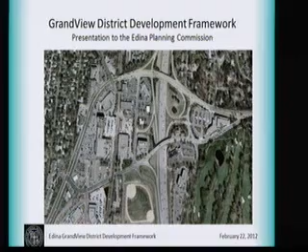So it's a good way, I think, for people to orient themselves as to the area that we're talking about.

So let me start with an overview of what we're going to be talking about. There are 4 things I really want to go through in the presentation. First is about the Grandview District. There are some characteristics about it that are really important to understand before you can think about what the future of that district ought to look like.

Second is describing really the process, and this has been what we think is a really new way of thinking about community engagement and community leadership in a redevelopment process. I'm then going to ask Mike Fisher to go through a description of what we envision, and then return to talk a little bit about what happens next.

So when we talk about the district, it is approximately 37 acres and 18 parcels within those boundaries. Over a third of the property in the district is publicly owned, and this is one of the things that distinguishes it from many other things we on the Planning Commission deal with, where we influence change entirely through regulation. Here we have some direct control through public ownership of a lot of the land in the area. It's home to City Hall, as I mentioned, and the police station on one end, and the library and senior center on the other end.

The Edina Public Schools bus garage is located within the district, and the public works site that is now vacated is also within the district.

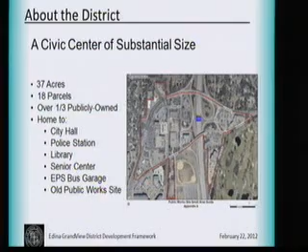As those who live in the area know, this is a true neighborhood commercial center. I live in the Highlands neighborhood, so I'm not far from here, but this is just a small list of the commercial services and goods that everyone who lives in the area uses on a regular basis. I know I'm up there every day patronizing at least one of these businesses.

The other characteristic about it is that it's really a kind of crossroads. It's a neighborhood center, but it has regional connections. So if you take a look at the map here...

You really have Vernon Avenue, which goes south. Once upon a time it was Highway 169, and it was the way you went from the Twin Cities down to Mankato. You've got Interlachen, which takes you up to St. Louis Park and Hopkins. Highway 100, obviously, north and south. And then there's the rail line.

If you take Vernon across 100, you get to 50th Street, and you're over to 50th and France. So it's a key place for regional connections.

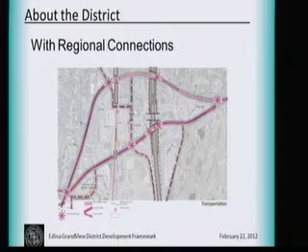The process we're engaged in right now was really triggered when the old Public Works building was vacated. It's about a 3.5-acre parcel, and for years the city was looking for a new home for the Public Works site, finally opening a new location on the south side of Edina in 2010, which left a vacant piece of property that triggered our work on this process.

In 2008, the comprehensive plan was amended by the City Council, identifying a number of areas around the city as potential areas of change. The Grandview District is one of those. The plan indicates that if there's going to be major redevelopment or rezoning in one of these areas, a small area planning process needs to happen first.

In December 2009, before the Public Works building was abandoned, some of us on the Planning Commission anticipated we'd need a planning process. We approached the City Council and requested permission to proceed with what we called a small area guide process. It was interesting for a variety of reasons.

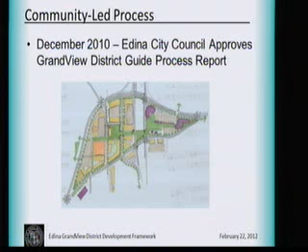In December 2010, we delivered a report to the City Council and asked for its adoption and approval, and the Council did adopt the Grandview District Guide Process report that came out of that compressed process. That report created 7 guiding principles, which I've listed here and will quickly sketch over.

First was to leverage publicly owned parcels and civic presence. Second was to enhance economic viability as a neighborhood center with regional connections. Third, we wanted to turn barriers like Highway 100, the railroad tracks, and the roads into opportunities rather than seeing them as barriers.

Fourth was to pursue logical increments of change. Gone are the days when you can just clear an entire area and rebuild it.

And we recognize that we have to do this parcel by parcel, which is a little more complex and takes a little more thought, but it's important for us to recognize. Fifth was to organize parking as an effective resource.

We had an interesting business member who came to us during the guide process. He has the UPS package store, and said it's really important for him to have parking right outside his window because sometimes customers come with a 40, 50-pound package, wrestling to get it out of their car, and he can run out and help them. If there's a central ramp that someone has to walk 100 yards to get to his business, it's not going to work for him.

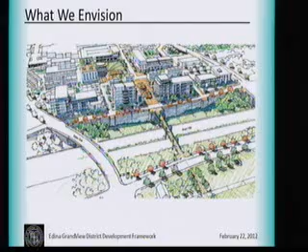So in summary, we want to create a place with a unique identity. We want to rethink and reorganize the transportation infrastructure. I'm going to talk about that a little bit. We're going to leverage these public resources to make incremental value-creating changes. And we're going to enhance that public realm to encourage the private development, as I just said.

So we want to create a place with unique identity. One of the key parts of this design is the Central Commons, which is located on the Public Works site - this entire block here. It's an idea of a community facility and community space, outdoor space, plaza-type space where people will gather.

Getting back to the plan, there's a go-to and a stay component. This area is designed for businesses along Vernon focused on drive-in, park, go in, do your business. But the other area of the development is more pedestrian-oriented - it's not that you can't drive there, but it's really about wanting to stay and spend more time.

So this is a concept of a community facility. We don't know everything that's going to be in this community facility - that's part of the next stage, where we as a community need to figure out what that means, what would be in that type of building, what would be programmed in the outdoor space, with a lot of mixed-use development around it.

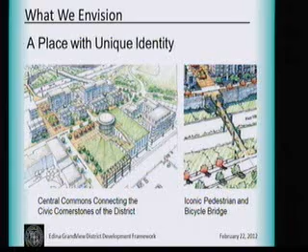Over here you can see a concept for a crossing of Highway 100. Let me go back just one slide. So again, the commons here, this pedestrian zone, and crossing 100.

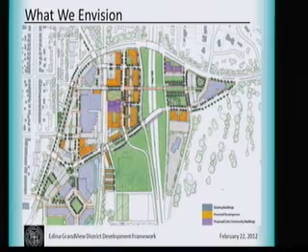One of the hallmarks of this plan is pedestrians and bicyclists being able to move through and around the area. Another very important element is connectivity - how do we bring people here, since this is a neighborhood center, yet it's almost impossible for neighbors to get here without getting in a car like the rest of the region would. So what we're trying to do is poke into the neighborhood on all sides so you can get here on foot and by bicycle.

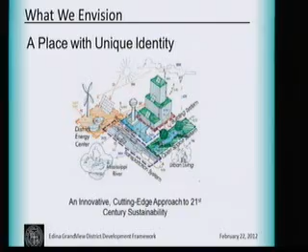Part of this unique identity is to be cutting edge and sustainable. I won't spend a lot of time on this, but overall we're thinking about the development, from the infrastructure to the buildings, being highly sustainable - rethinking and reorganizing the transportation infrastructure.

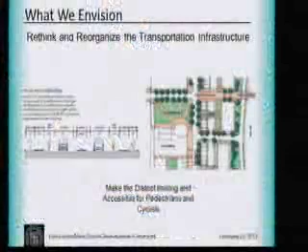When I showed you Vernon Avenue earlier - we just had a couple days of talking about living streets in our community - this is an ideal example of how we can rethink Vernon Avenue and transition it from a highway to a local city street again, by right-sizing it, having bike lanes, sidewalks, and safe ways to cross Vernon. It does not have to act like a highway as it comes through this area.

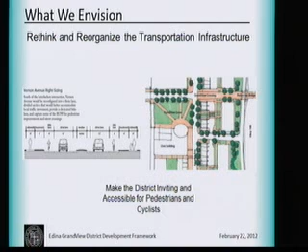And also the Grandview crossing, as I pointed out earlier, the bridge crossing over 100. We're actually, I'll show you in a second, creating a few new street connections.

Use this illustration - so the plan on the left, here's Vernon, where I talked about rethinking and redesigning it. There's also a connection - this is the library right here, and this is Jerry's up here. One of the ideas is that right now, from Grandview Square to get up to Jerry's is not a pleasant walk - I'm not sure you'd want to do that of your own free will. And where the bus garage is now, imagine these big yellow buses hanging out all over the place, over the edge of the property line.

One other thing I want to note: part of the original concept, with the library here, was this idea of creating a front lawn to the library - bringing the library out to Vernon, connecting the two. Right now the library is set back, so you can't really appreciate it as you're coming along Vernon. The concept was to close Sherwood up here, add parking in front of the library, and bring Sherwood out on 53rd.

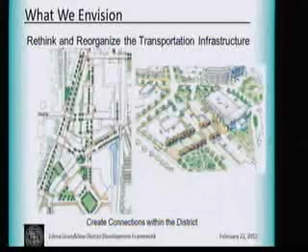I didn't point out, this was that concept we were talking about with the lawn in front of the library and that parking. So we think there's some other ways to accomplish this and not necessarily completely change Sherwood there in front of the library.

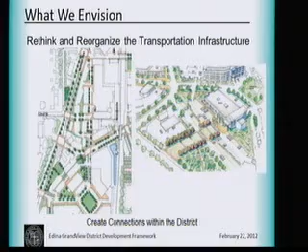So I'm going to roll a little faster here. Rethinking and reorganizing the transportation infrastructure. Now, as we look at the whole area, a couple key moves here. I talked about creating a new street, and it will be right through here.

So this is what we all think of as Jerry's Hardware, which is now soon to be Walgreens, and the new Walgreens drive-through here. This is the Jerry's, or City, it's actually the City parking ramp behind Jerry's. But to actually create a bridge across the tracks right here and have this street go all the way through, which would go just north of the commons I was just talking about, and then it turns into a pedestrian street right here as you cross the bridge over to the City Hall side of the highway.

Ultimately reorienting the development on the north side, so what we think of as the Starbucks building right now, actually reorienting itself to look south towards the commons, but also still having parking and opportunities for fronting on the other side as well. It's taking advantage of a reorientation and the idea of a street coming through here.

But then taking Gus Young Lane and having that as a one-way going out. So we can, by doing that, reassign turn lanes up on Vernon to Interlochen to make the traffic actually flow much better. I'm not going to get into all the details of the traffic engineering, but there are some ideas there that can help move traffic through.

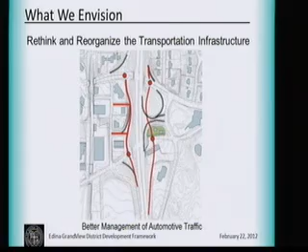I have a diagram here that shows, you can see in the gray, all of the highway infrastructure, these loops that were actually built when these were two highways intersecting. These aren't two highways anymore, it's a city street meeting a highway. So all this additional highway infrastructure could go away, creating other public amenities or development opportunities, or just green space for nothing else.

And this just gives you an idea of the richer street network that we will have 30 years from now, hopefully, than what we have today. The left is today, the right is in the future.

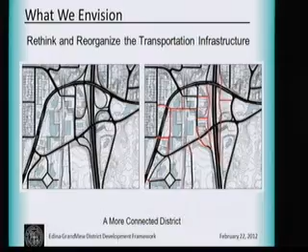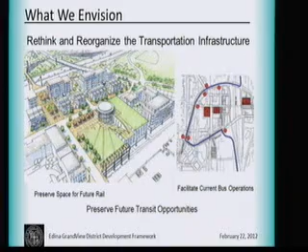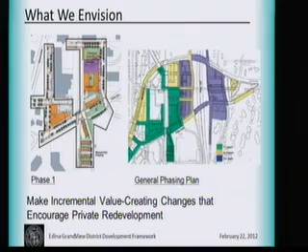We can make this change incrementally. I'm not going to get into great detail, but the idea is we're starting to think about what are the first pieces that can start all this happening. And it includes, obviously, the land we can control in turn - when I say we, the public. So we've got the bus garage and the public works facility as ultimately two easy places to start the process.

And again, that notion of enhancing the public realm to incentivize the private development to happen. Here you can see all of the substantial public realm that could ultimately be improved and developed in this plan.

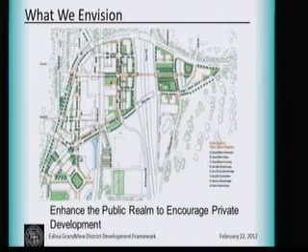And with that, I'll have Kevin kind of close it out.

Thanks, Mike. So a couple of slides on what happens next. Obviously, we're in a public comment period now. This is the public hearing we're holding, but we're also holding public comment open until March 9th. There's a variety of ways people can chime in. We've talked about the blog on the Edina Citizen Engagement site - encourage folks to get on there and share their thoughts about this. We really want to hear from people.

Tonight we had an open house out in the atrium here that included a number of poster boards, et cetera, that gave you an idea of what we're working on. We will have a portion of that continue to be set up here at City Hall as well as at the Hennepin County Library in the Grandview area, along with comment cards. So if folks at their leisure want to come through, take a look. We'll also have copies of the full plan or framework available at those places and comment cards so people can write down some thoughts.

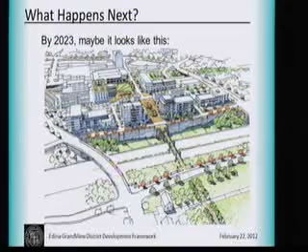So it looked like this in 1953. Maybe by 2023 it looks like this. So I want to thank you. I know this was a long presentation, but I appreciate your attention, and I look forward, as I know the steering committee members do, to hearing comments from the public.

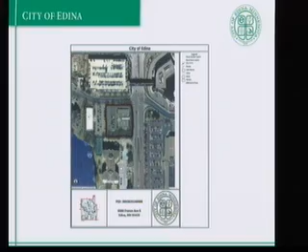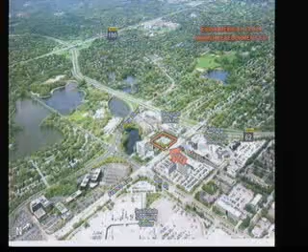The property is located at 6500 France Avenue. It's kitty corner from the hospital. This is a bird's eye view. This is the Point of France here. It's the site just to the north. It's the existing Milovitz building. This is a look at what that building looks like today.

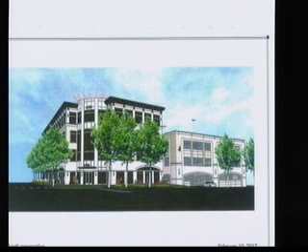The applicant is proposing to tear this structure down and build a new 60,000 square foot medical office building with an attached parking ramp. They're considering retail on the first level that would include potentially a coffee shop and medical supply type retail uses. The property currently is zoned POD, planned office district, and the applicant would be contemplating a rezoning of the site to planned unit development.

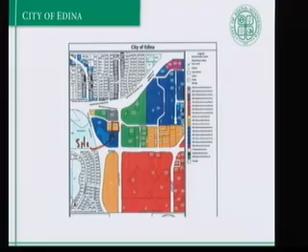This site is located, as we've looked at this map earlier this evening, in a potential area of change. Any time a rezoning is proposed in those areas, the decision to do a small area plan rests essentially with the City Council. So we would be looking for the Planning Commission's recommendation on whether a small area plan would be necessary before we consider any rezoning, similar to what we did with the proposals up at 44th and France and 70th and France as well.

When looking at the current zoning in the POD district, there would be a number of variances required under that existing zoning, 10 of them to be exact. The building setback requirement is based on the height of the building, which would be 55 feet. The applicant is proposing a 15-foot setback from 65th, a 15-foot setback on France, and a 20-foot setback on the south lot line that abuts the Point of France. The parking structure would be 46 feet tall, and they're proposing a 15-foot setback, 10-foot setback, and 10-foot setback. So variances would be needed under the existing zoning today.

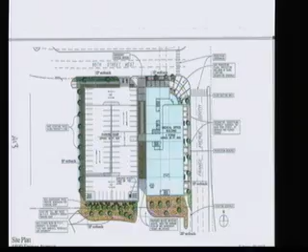Also, the height of the building would be 55 feet, as I mentioned, and the district requirement is 48 feet. The building coverage requirement in the POD district is 30%. The building coverage proposed here is 63%, another variance there. The maximum floor area ratio is 50% in this district, and the proposal is for 106%. And for parking stalls, they would be providing parking based on the need of the building itself, but it would be short parked based on code, so a variance would be needed there.

Now, again, as we've talked about with the PUD process, there wouldn't be variances—it would be rolled into the PUD zoning. And if approved, or if this is a project that we want to pursue, those existing or proposed setbacks become the requirement for that district.

This is somewhat similar to the Twin Cities Orthopedics Building. You may recall that was approved back in 2008. There were 9 variances associated with that project, similar, maybe not quite as large as we're seeing here, but there were 9 variances. The PUD process was not available to us at that time. So with that, the proposal would be an improvement over the existing uses that are out there. The proposed uses certainly would fit into this district, kind of that medical campus setting.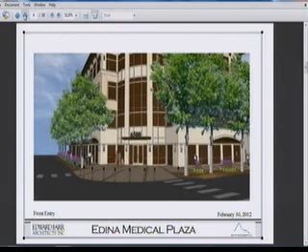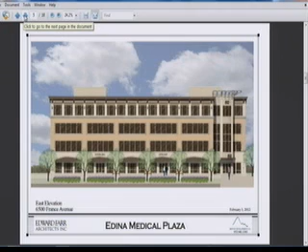Here's the main facade, the France Avenue facade. Again, traditional building. Our mission here is to be a healing center, so warm materials, very inviting. People are coming here in pain, and we want to make them as comfortable as possible. The use of face brick, a very warm, common, understandable material. The base, with the arches and rusticated limestone look, gives strength to the building. Up at the top, a very distinctive cornice line with interesting shadow lines and articulation to make it an interesting building on the skyline, punctuated at the corner at 65th and France with that scalloped crown element that will look good day and night.

Just a couple of images I'll fly around real quick here for you. You can start to see a parking deck along 65th Street, which we're going to build using the same compatible building materials as the building itself—a lot of the arching, the rusticated base, and the tonality of the structure. I'm showing it to you here with the trees that are existing, but actually the trees are much bigger—I had to scale them down for my rendering, because you couldn't see anything. So I decided to peel them off in the next slide. It's the same image without the trees, so you can see the architecture, but of course the trees would be there.

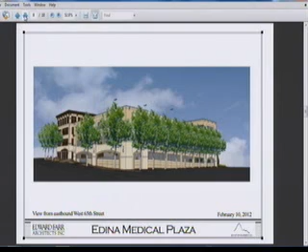Similar on the eastbound approach on 65th as you pass by the apartments on your right and the Twin City Orthopedics building, this would be the view as you approach the stoplight. Here's that row of trees on our western property line that would screen the parking structure. Please note I'm showing all these renderings with the full build parking structure up for the entire height. We're not proposing to build at these heights—it would be one story less. We're proposing 275 cars with proof of parking to add this final level deck. We wanted to show the ultimate visual impact, but we're proposing one level shorter. This same view without trees looks like this—again the same building material themes in the parking structure, variety of material, texture, and shadow lines, but with the trees there it'll be mostly hidden, especially at one story less.

Mr. Farr, just so I'm clear and everybody's clear, the last drawing you showed—that's the full height of what could be with the proof of parking, but what you'd originally start with would be one story less than that on the parking garage. Is that what you're saying? Yes. Okay, thank you for that clarification.

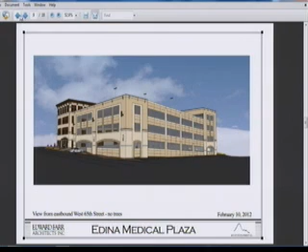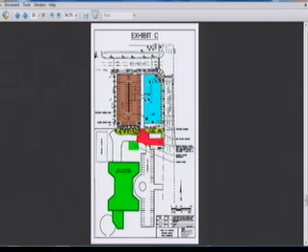So I'll skip over this, and we'll have a Plan B. Back on our site plan off of 65th Street, we're going to have a curb cut for emergency vehicle access and nighttime trash pickup, so that can be off of the street adequately. Not unlike something you've approved before in your community down at the law office off 494 and 169, which has a similar treatment off the public road, as well as the TCO loading dock on the east side of their building. In that case, our trash storage room would move from the south end here to the north corner.

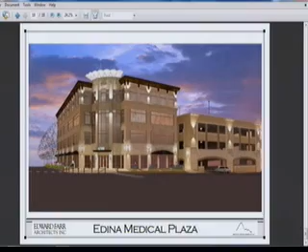So I'll leave it with that. If you have any questions, we'd be happy to entertain them. Steve's going to make some closing comments regarding sustainability and car topics, I believe.

Some of the interesting transportation items we'd like to propose for the building: we're seeing a good number of electric cars, and we'll give them preferential treatment in the ramp with car charging stations. The smart cars take about half the parking stall size of our traditional cars, so we'll continue to promote that.

There's a program provided by ZAP. They have a chip, similar to a running race, that you'd have on your scooter, bicycle, or motorcycle, and it monitors the number of times you come into the facility. You can calculate the amount of CO2 poundage you're reducing throughout the year, and we'll give incentives to those people based on how often they come to the building. Their bikes and scooters will be put in a warm, temperature-controlled environment as an incentive to use that type of transportation.

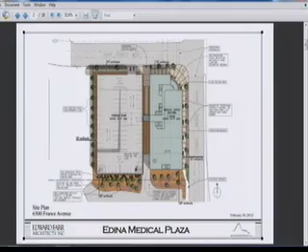Commissioner Potts: a couple of questions, again, to make sure we're clear on the parking. You've stated 275 stalls proposed - is that minus the top deck on the renderings you're showing? Yes, that's correct. And have you done a count of where you'd be if you had the full built ramp? Yes, that is 336. We have 26 cars on the lower level of the office building itself in the basement.

The remainder are in the ramp, and one level of the ramp is below grade, one at grade, three up. Okay, thank you. And do you know, or Cary, maybe you do, were this building, if all 60,000 square feet were medical, what the parking requirement would be?

It's a formula - it'll take me a little bit to calculate it, but I can do that. Okay, that's not critical tonight, but I guess as I think about the way this has been described, it seems like they're counting on most of the retail traffic to come from within the building, so it's not an additional trip to support the retail.

In round numbers, that would be factored in as part of the study being done by WSB, so we'll need to nail down the uses a little bit more. In round numbers, I believe this medical district has approximately 5 per thousand plus 1 per dock, so it would be 60 times 5, 300 plus the docks. Hence, we're proposing to meet that at the 336 level.